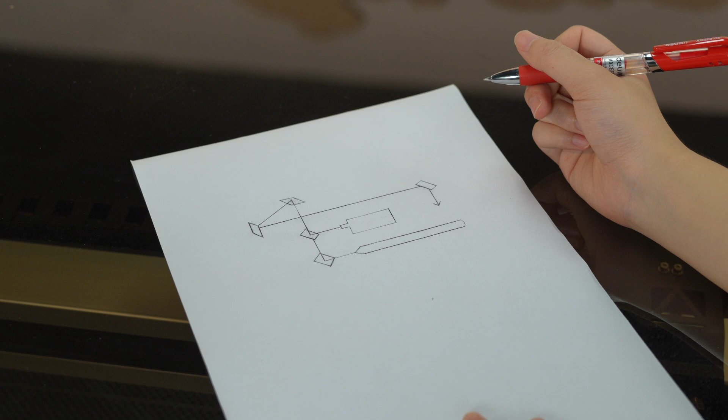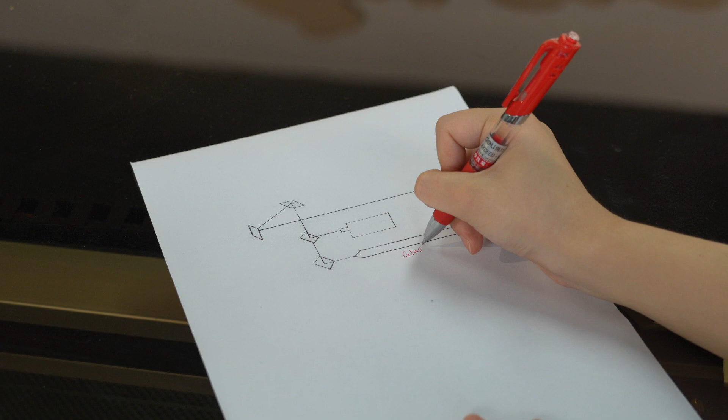Before we get started with alignment, let's go through the process in advance. We set up double tubes for the Nova Super machine: a high power glass tube and an RF metal tube.

So we have two alignment processes to go. Let me first introduce each of the mirrors. This is the glass tube; the mirror facing it I call mirror A1. This is the RF metal tube; the mirror facing it I call mirror B1.

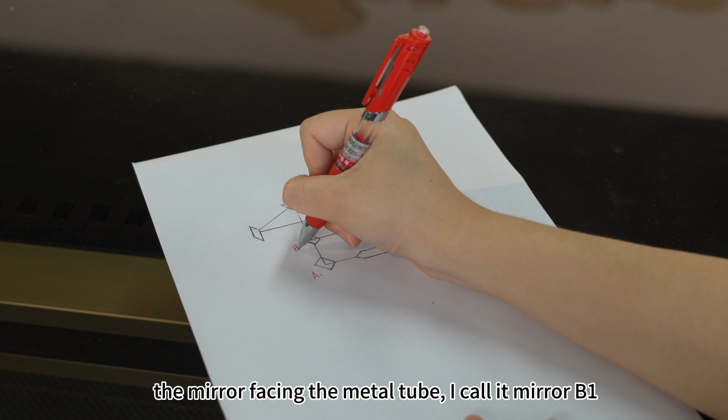These are mirror 2, mirror 3, and mirror 4 on the gantry. Mirror 4 is on top of the laser head.

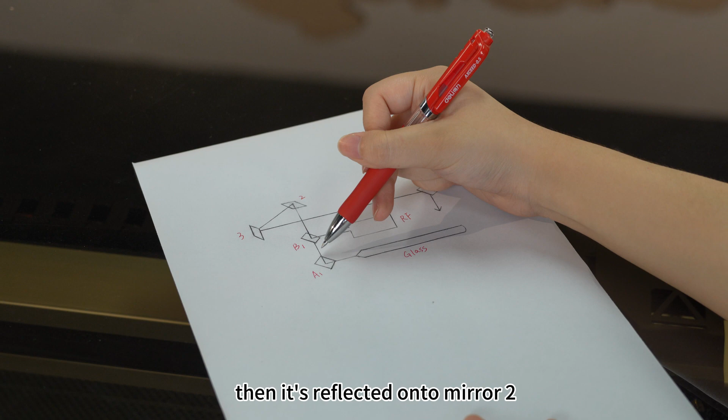The beam from the glass tube first hits mirror A1, then is reflected onto mirror 2, then mirror 3, mirror 4, and finally reflects vertically onto the surface of the material. The beam from the RF metal tube first hits mirror B1, and the following beam path is the same as the glass tube, passing through mirror 2, mirror 3, and 4, finally reflecting on the surface of the material.

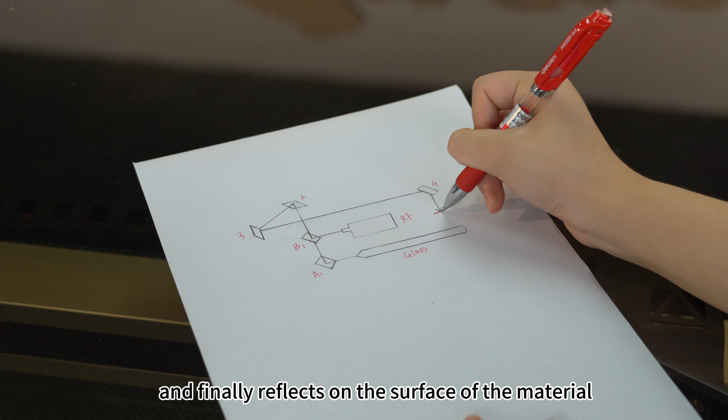Let's do the mirror alignment for the glass tube first. Before we do the operation, let me show you the tools we're going to use this time.

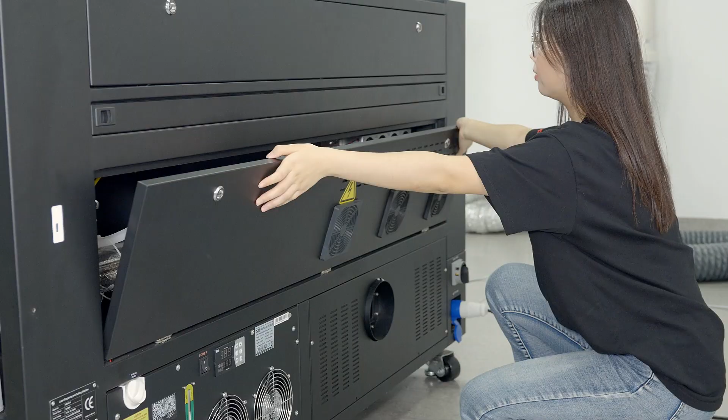To get started, we open up these two side panels of our machine. This one is for the glass tube, and this one is for the RF metal tube.

Now we go for the glass tube. There is a bracket here. You can move the tube forward and backward by adjusting these 4 screws, and unscrew these 4 nuts.

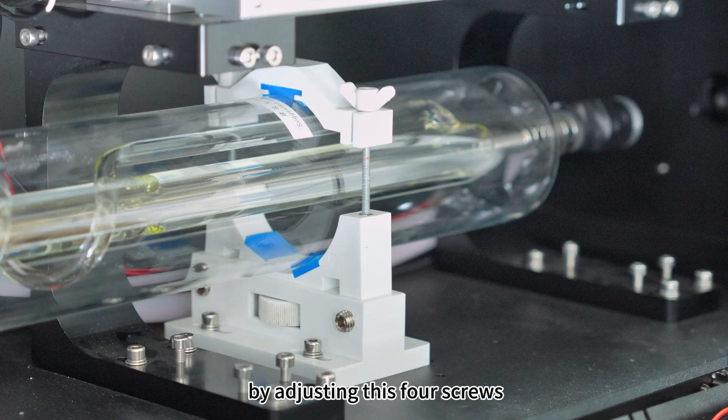You can use this rotary knob to control the height of the tube. Now, what we need to do is adjust the position of the glass tube.

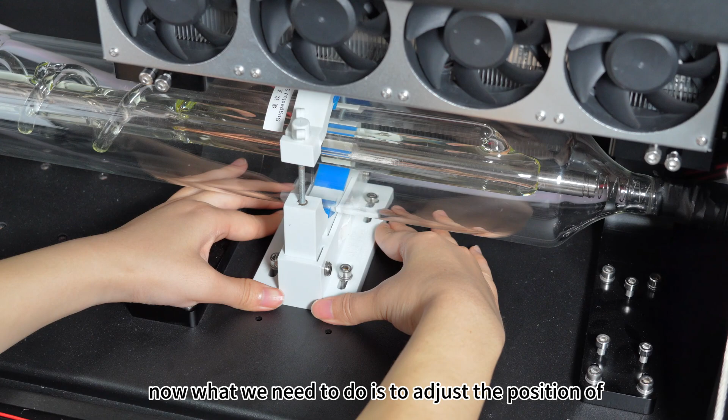Mount an acrylic target on the circular hole directly opposite the glass tube. Take a shot and try to let the beam pass through the exact center of that circular hole.

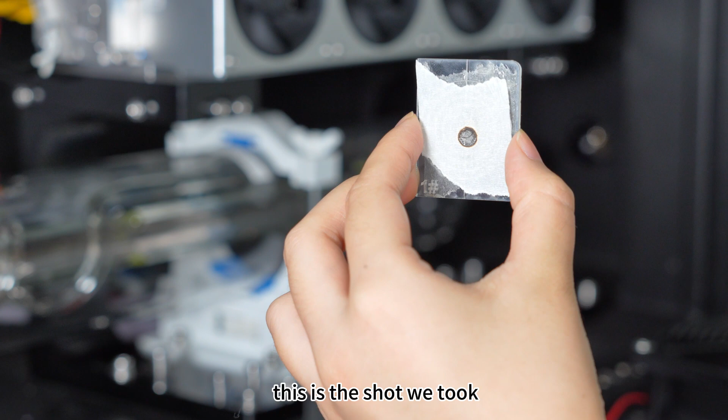This is the shot we took. It's almost in the center, so it's done. After adjustment, lock every screw right here.

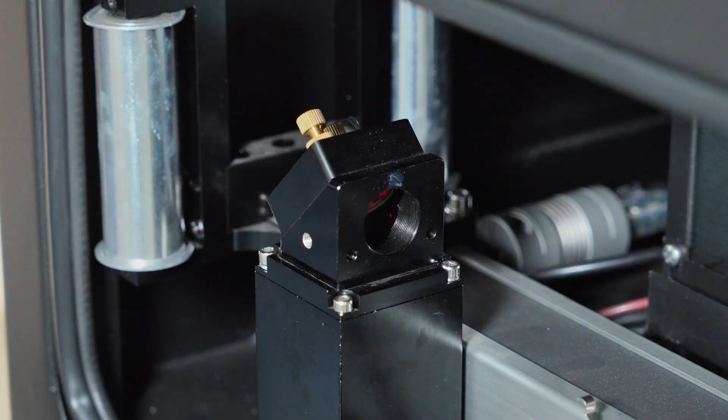Now we come to this side. Unscrew these 4 nuts and remove this whole part with mirror 2. Break the plug here and take off this whole part with mirror 2.

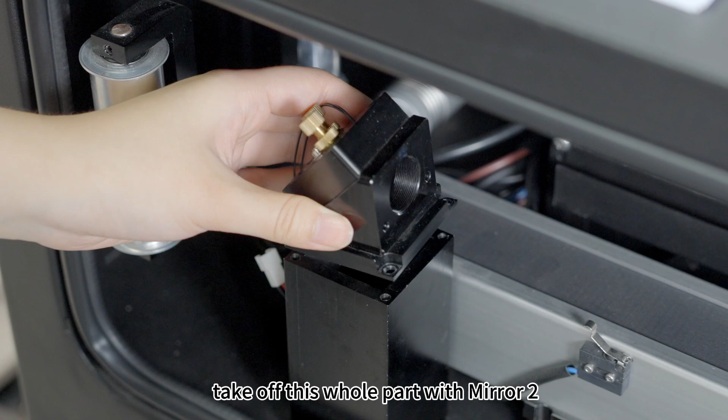Put an acrylic target on the bracket under mirror 2. Make sure you push the target against the bracket and take a shot.

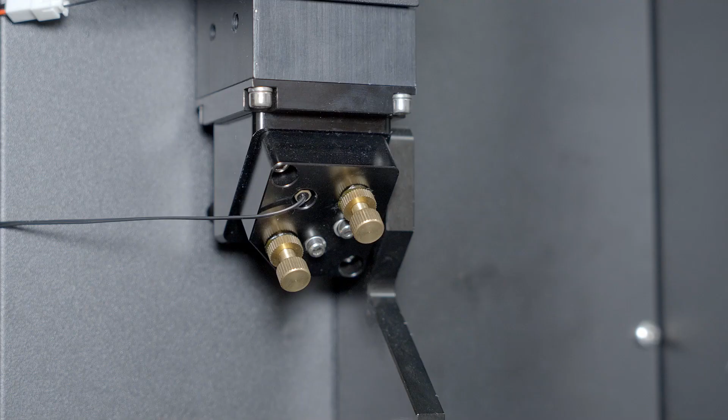If you look at this burn mark, it was over to the left, so we should adjust the knobs to try to get the beam in the center. The way you turn the knobs will control which way the beam turns.

As for the left knob, if you turn it clockwise, the beam will go to the right; counterclockwise, it will go left. As for the right knob, turning it clockwise makes the beam go up; counterclockwise makes it go down.

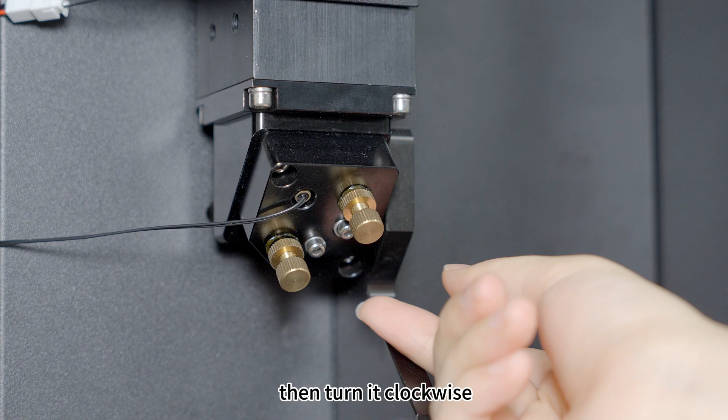So in order to move our beam to the right, I need to turn the left knob clockwise. Before we do that, unlock the nuts behind it. Then turn it clockwise. Let's take another shot to check.

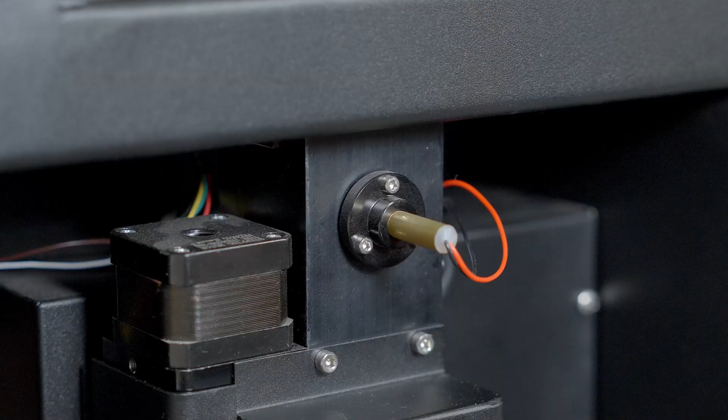This time, the burn mark is in the center. Great! To make it easier to observe the motion trail of the beam later, now project the red light onto the center point here. You can move the red light by adjusting these 3 screws. Let's do it.

Since the whole part with mirror 2 needs to be installed in the following operations, now we align the beam from the RF metal tube to be at its burning point. Let's go to the RF tube operation.

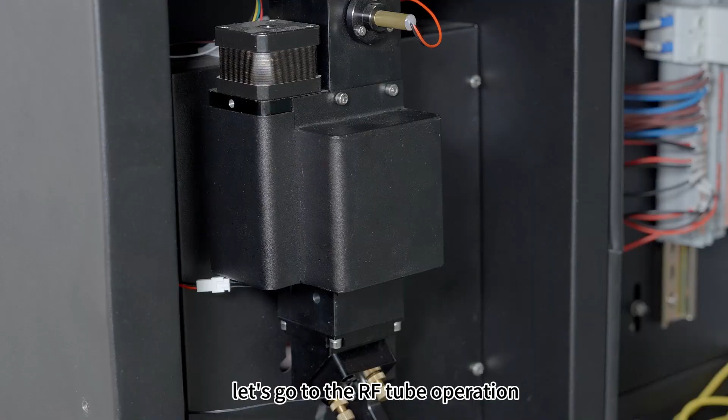Use a screwdriver to take out the screws and remove the big cap.

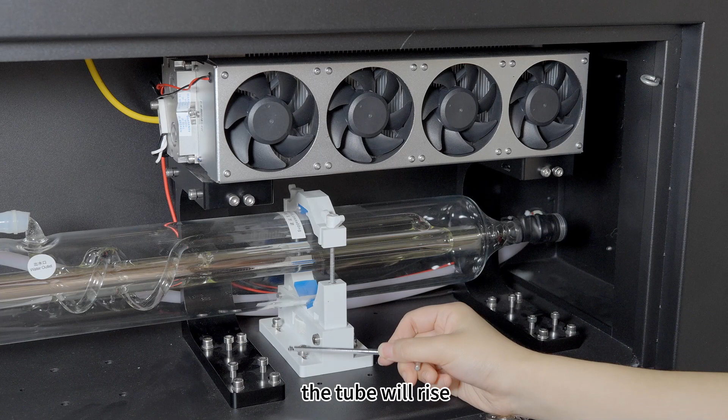First, adjust the position of the RF tube. These 2 brackets here control the height of the RF tube. If you tighten the top screws and loosen the short ones, the tube will rise, and the opposite situation will occur in reverse.

These two brackets here control the horizontal position. If you tighten the top screws and loosen the short ones, the tube will move outward. In reverse, the tube will go inward.

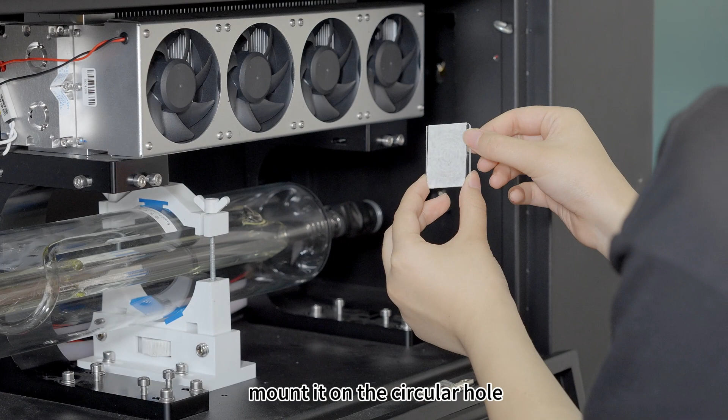Change a piece of tape on acrylic target number 1, mount it on the circular hole directly opposite the RF tube. Switch to RF tube mode and take a shot.

This is the shot we took. It's exactly in the center. Very good. Next, come to this side again.

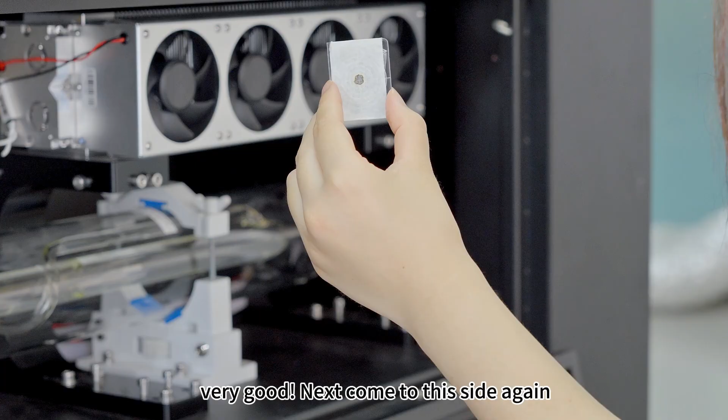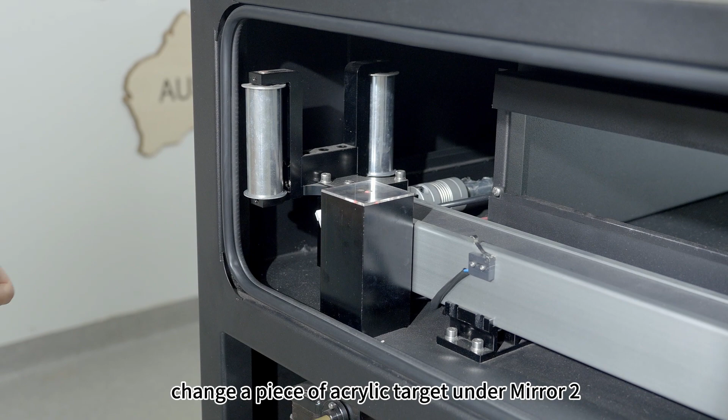You can see we are still in RF tube mode. Now switch to glass tube mode. In order to facilitate observation, change a piece of acrylic target under mirror 2 and take a shot.

Due to the previous adjustment, we got the burn mark in the center. The next thing we have to do is try to get the beam from the RF tube to the same position. Now switch to RF tube mode and take a shot.

This burn mark is a little bit low and over to the left, so we should make adjustments. Let's adjust these two knobs.

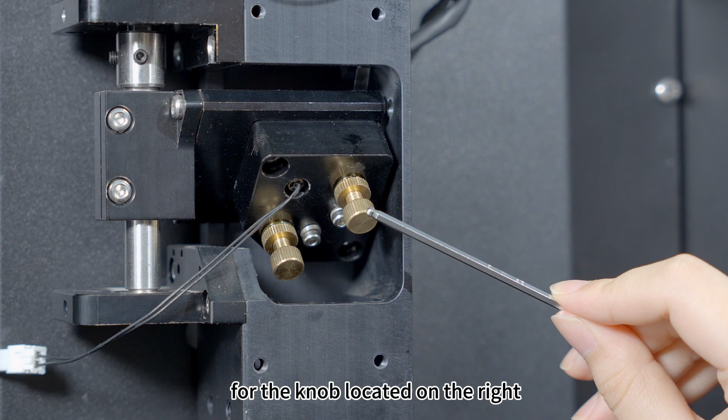For the knob located on the right, turning clockwise will raise the beam up; in reverse will lower it. The second knob, located on the left, turning clockwise will move the beam to the right; in reverse will move it to the left.

So our adjustment should be a clockwise turn of the right knob to move the beam up, and another clockwise turn of the left knob to move the beam to the right.

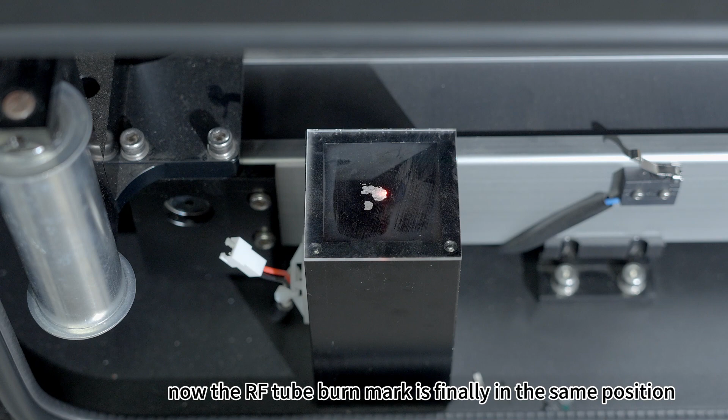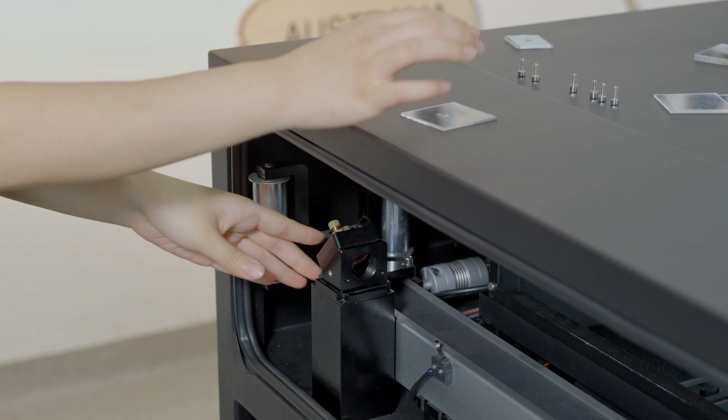Now the RF tube burn mark is finally in the same position as the one from the glass tube. Put this whole thing with the mirror 2 back, and lock all the screws.

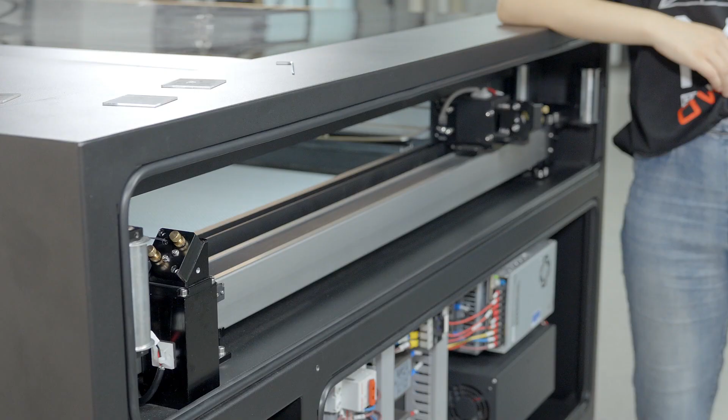Next, take a near and far shot on the y-axis. Try to get the burn marks on the center of the targets and have the two marks overlap. Switch back to glass tube mode, then jog the gantry all the way to the back.

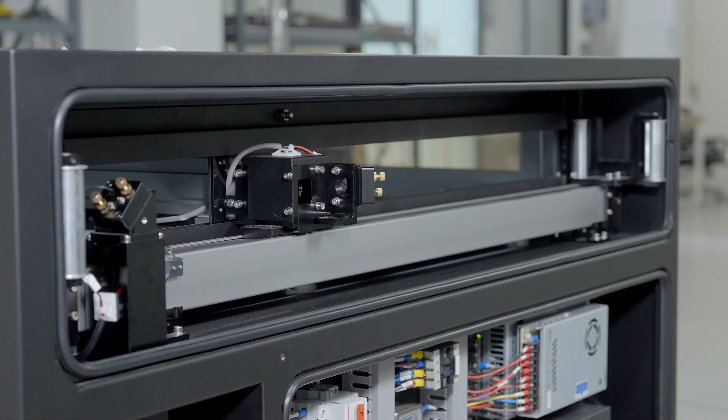Mount acrylic target number 3 on the mirror 3 bracket. Push it against the back wall, make sure each side is nice and flush, and put tape on it.

Take a shot. The burn mark is low and to the right. In order to get the beam as close to the center of the target as possible, we have to raise it up and move it to the left.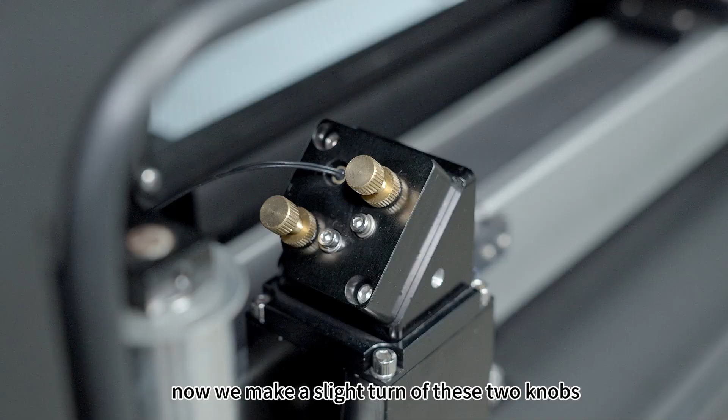Now we make a slight turn of these two knobs. If you remember from the last mirror, the knob on the right adjusts the laser right to left. Turn it clockwise, the beam will go to the right; turn it counterclockwise, the beam will go to the left. The other knob, turned clockwise, will lower the beam; in reverse, it will raise the beam up.

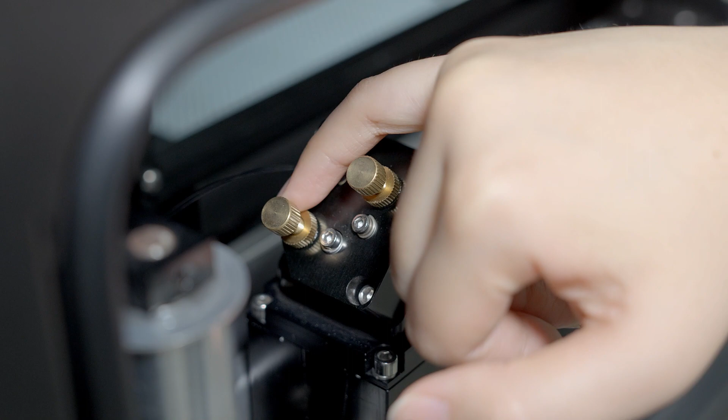Again, we start by unlocking this first, then turn the two knobs counterclockwise.

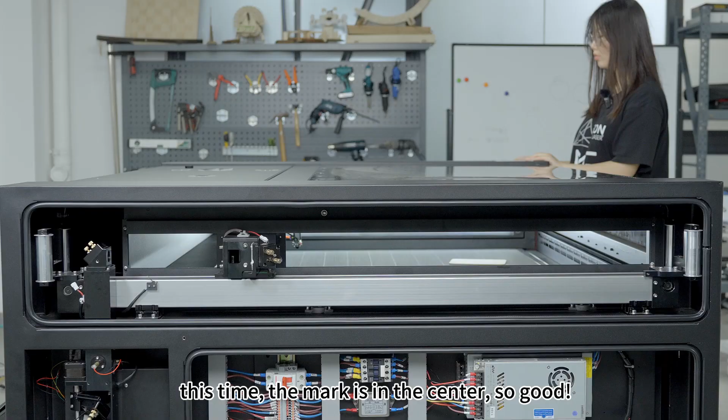Let's check again. This time the mark is in the center, so good. Jog the gantry to the front side to take a far shot.

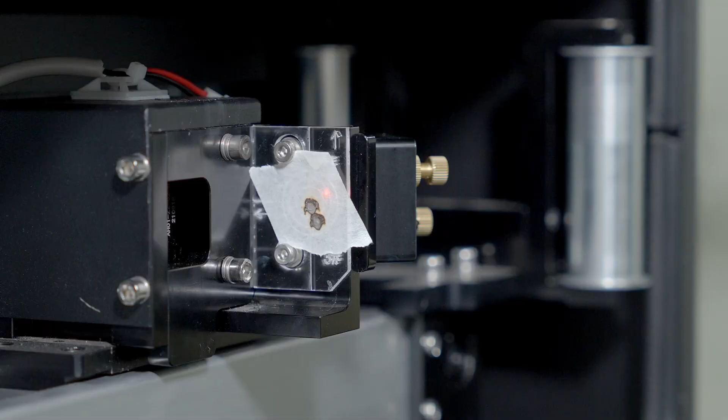This is the center point we got from the near shot. To make sure the beam is shooting parallel right down the baseline, the far shot burn mark needs to be in the same location as this center point. Press the pulse button.

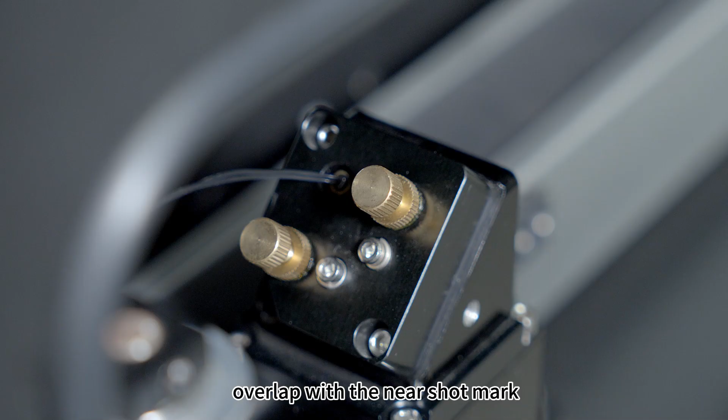You can see the far shot burn mark is still a little bit low and over to the right, so we need to turn the knobs to get it overlapped with the near shot mark. The adjustment this time is the same as the near shot operation - turn the two knobs counterclockwise.

Take another pulse. We got one burn mark in the same spot as that near shot mark. Don't forget to lock the knobs behind. To provide reference for a later operation, now project the red light on the overlapping point.

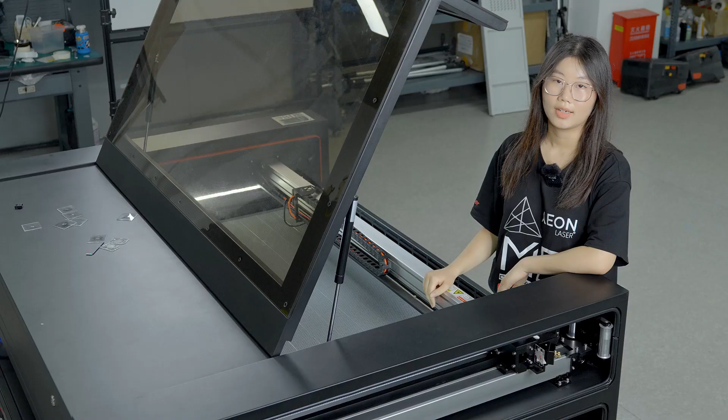Right now, the beam pass test from mirror 2 to mirror 3 is finished. It's a turn for alignment from mirror 3 to mirror 4. It's exactly the same as the last one - it's still necessary that the burn marks of the near and far shot be in the center of the targets as far as possible and overlap.

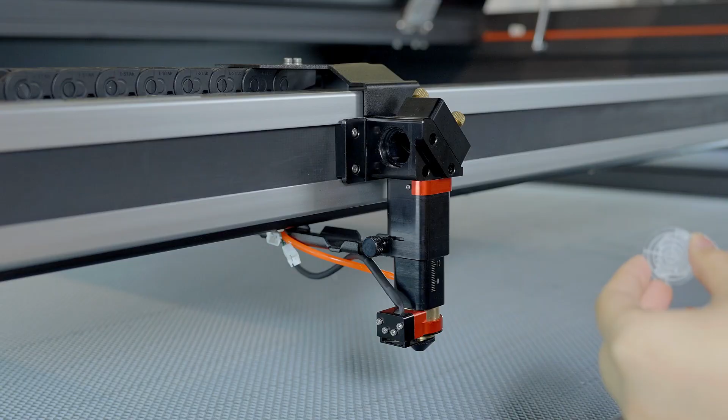Jog the gantry to the left. Install the circular acrylic target right on mirror 4, which is in front of the laser head. Push it against the back, and put tape on it.

Press the pulse button. The burn mark is a little bit to the left, so we should make adjustments with mirror 3 to get it to the right. Let's make adjustments with these two knobs.

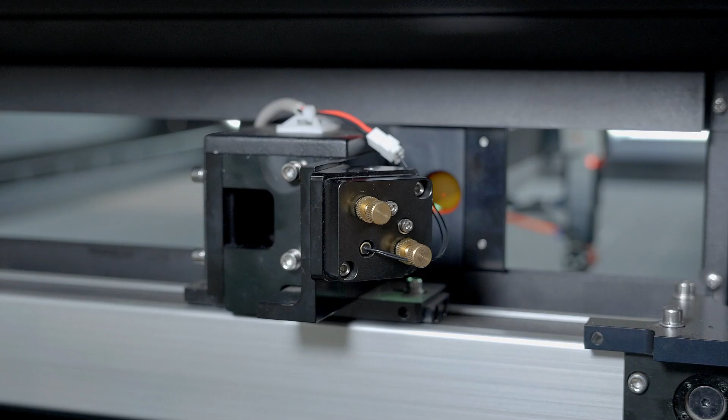The knob on the left adjusts left and right movement of the laser beam. Turn it clockwise, the beam will go to the right; in reverse, the beam will go to the left. The knob on the right adjusts up and down movement of the laser beam. Turn it clockwise will move the beam up; in reverse, it will lower the beam.

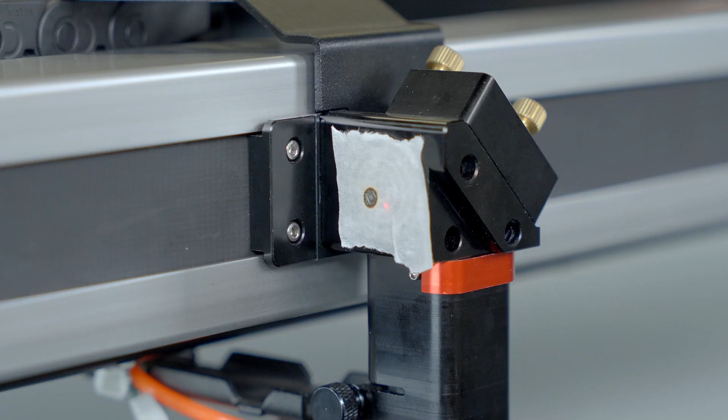Now we should turn the left one clockwise. Then check again. This time the mark is almost in the center.

Very good. Now we should take a far shot and get the far shot burn mark to overlap with this center point. Jog the gantry to the right.

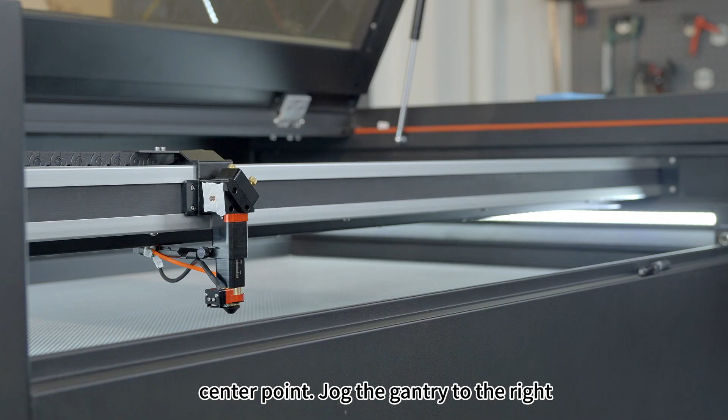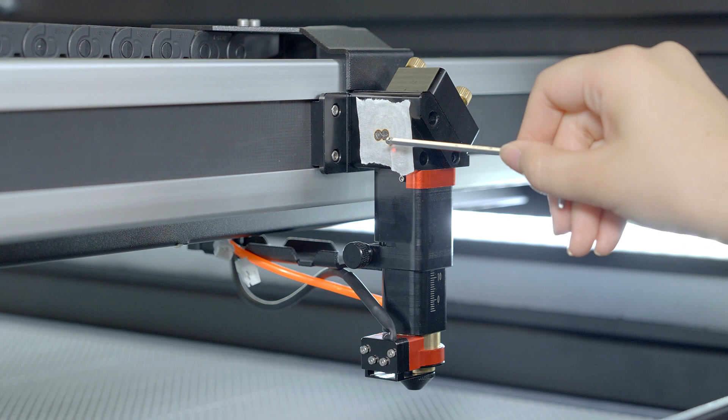Press the pulse button. This is the shot we just took. Obviously, it's low and over to the right. So we still need to make adjustments with the knobs to get it to overlap with the center point.

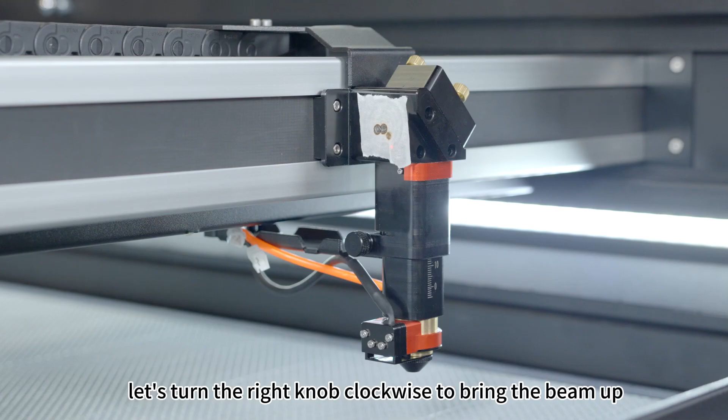Let's turn the right knob clockwise to bring the beam up, and turn the left one counterclockwise to move the beam to the left. Then take another shot. Good, this time they coincide at the center point.

Again, project the red light on the center point. Alright, the red light is now on the center point.

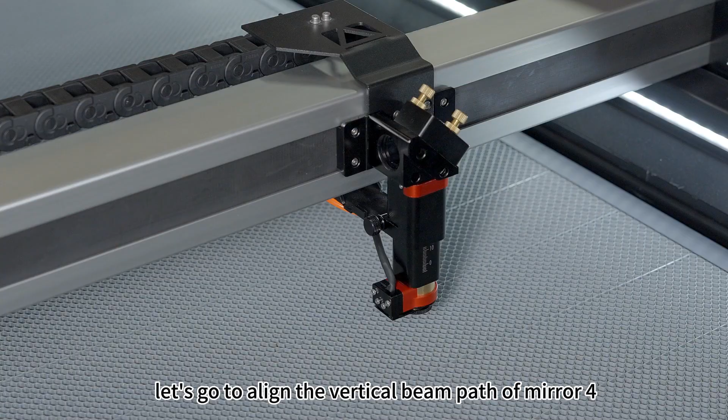Now that all alignment before mirror 4 is finished, let's go to align the vertical beam path of mirror 4. We need to adjust the vertical direction of the beam path so that the beam can pass through the small hole below - this is the small hole - and finally get to the surface of the material. Let's remove the nozzle.

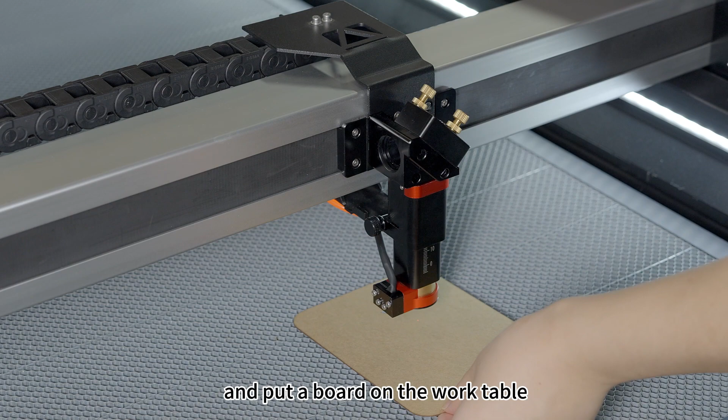Put a board on the work table. Press the pulse button. It can be observed that the beam mark position is too offset, so adjust these two knobs. Try to make the beam mark be positioned vertically below the laser head.

We are going to get the beam down and to the left. For the knob located at the bottom, turning it clockwise will get the beam to the left, and in reverse will get the beam to the right. For the second knob, turning it clockwise will get the beam down, and in reverse will raise the beam up. So our adjustment should be a clockwise turn of the bottom knob and another clockwise turn of the second knob.

Press the pulse button again to check. This time the burn mark is almost in the center. So next we put the nozzle back.

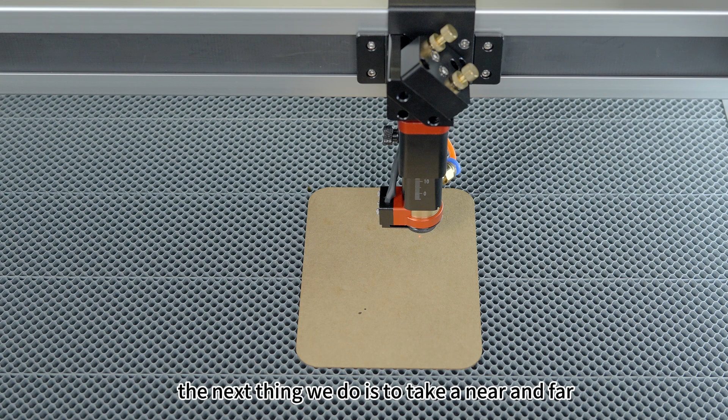As you can see, the red light has already come out of the small hole. The next thing we do is to take a near and far shot on the board. Now press the focus button.

Then take a pulse. This is the near shot we took. Then move the work table down.

Take a pulse again. Obviously, this far shot is shooting perfectly in the same spot as the first near shot. If you find out that the far shot doesn't overlap with the near shot, just adjust these two knobs again.

Next, project the red light on the overlapping point. By now, all the mirror alignments for the glass tube are done. It's time to align mirrors for the RF metal tube.

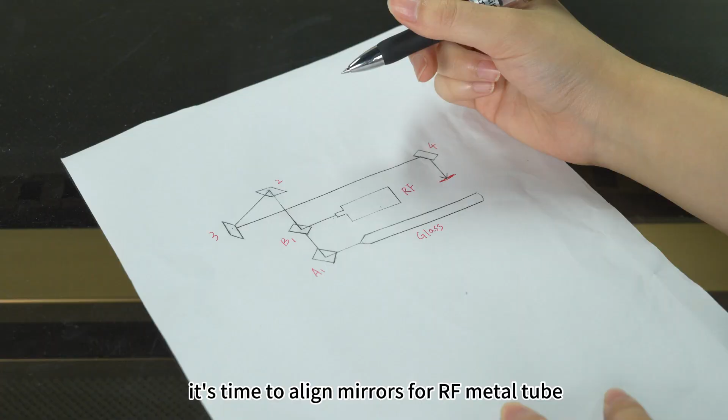Since glass tube and RF tube both need to pass through mirrors 2, 3, and 4, and we have already got an ideal beam path by doing mirror alignments for the glass tube, now we only need to align the beam path of the RF tube with the beam path of the glass tube.

As the near and far burn marks of the glass tube on the y-axis have coincided, now we can choose any point on the y-axis to align the two beam paths. Since we have just done the mirror alignment operation under mirror 2, we will directly choose the middle position of the y-axis here. Now we only need to align the beam path of the RF tube to the beam path of the glass tube at this position. Let's get to it.

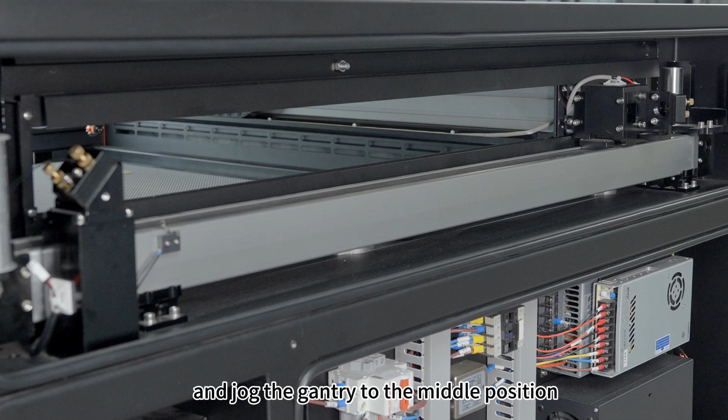Now we are still in glass tube mode, and we jog the gantry to the middle position. Mount acrylic target number 3 on the bracket. Make sure each side is nice and flush.

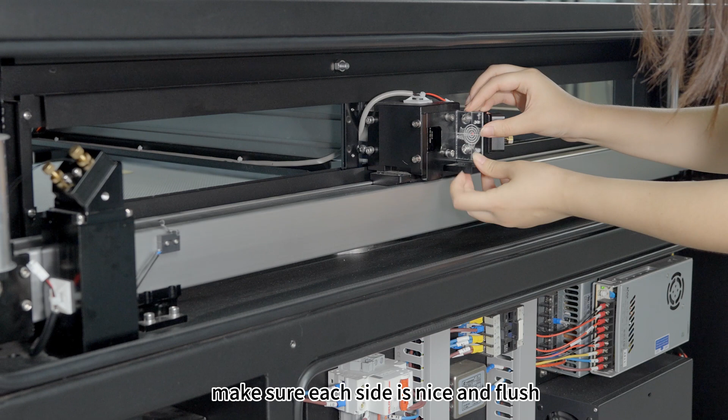Put a tape on it and take a shot. Okay, we got the beam spot from the glass tube on the y-axis. We need to get the beam spot from the RF tube to overlap with this spot.

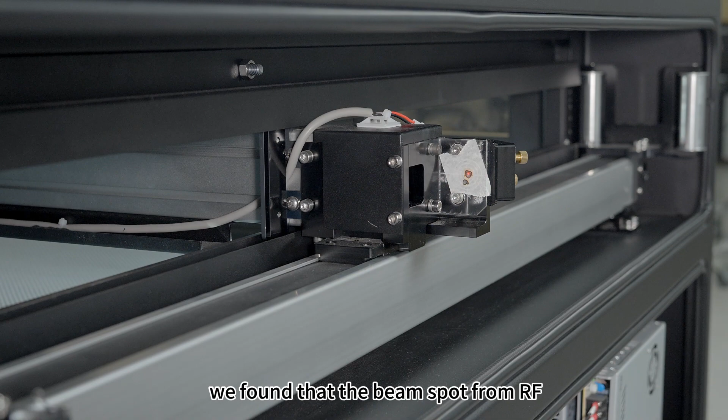Then switch to RF tube mode. Take a pulse again. We found that the beam spot from the RF tube is on the lower left of the glass tube spot.

Now we need to move the beam path of the RF tube up to the right. Let's make adjustments to mirror B1 to move the beam spot of the RF tube onto the spot of the glass tube. Then take a pulse again.

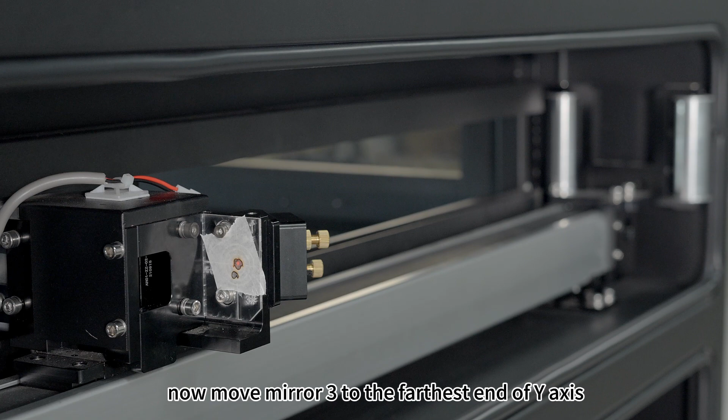Very good, the two beam paths almost overlap on the middle position of the y-axis. Now move mirror 3 to the furthest end of the y-axis. Repeat the previous steps to see if the two beam spots coincide as well.

Good, they overlap. If you find that the beam spots don't overlap, just continue to adjust mirror B1. So far, we have completed the adjustment for the beam path of the RF tube on the y-axis.

Next, we only need to align the beam path of the RF tube with the one of the glass tube on the x-axis. Then all the beam path adjustment work is basically completed.

As the near and far burn marks of the glass tube on the x-axis have also coincided, we can choose any point on the x-axis to align the two beam paths. I recommend you choose a far point. Switch to glass tube mode.

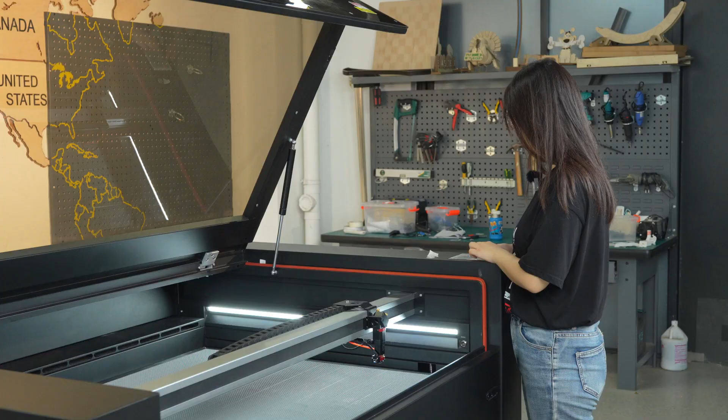Mount the circle acrylic target on the mirror 4 bracket. Push it against the back. Put a tape on it. And take a shot.

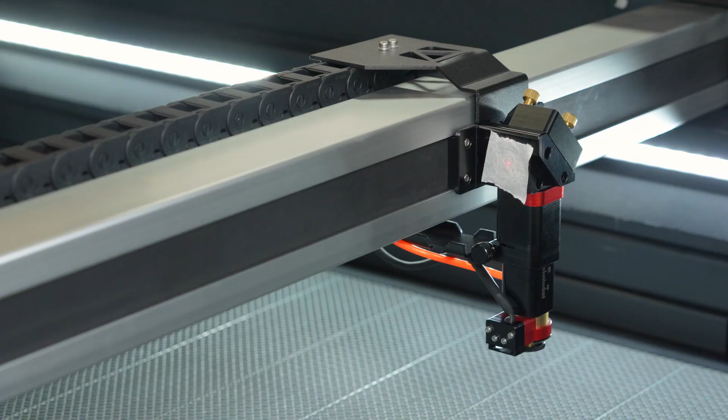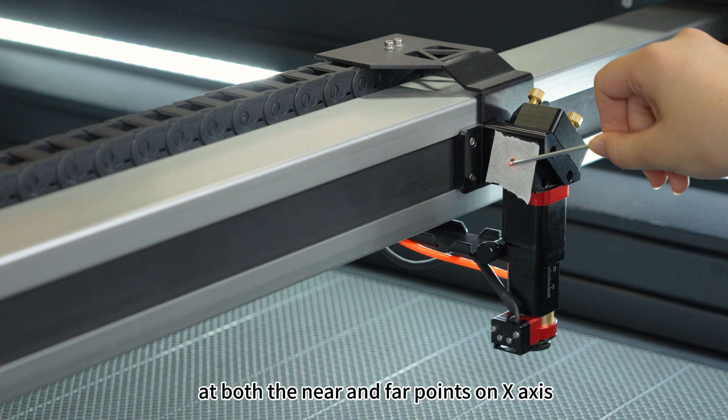We got the beam spot from the glass tube on the x-axis. Next, we align the beam path of the RF tube to this beam spot at both the near and far points on the x-axis. Let's continue to do the work.

Jog the gantry to the left. Switch to RF tube mode. Pulse at the near point. Okay, the two marks overlap.

Let's move mirror 4 to the far point of the x-axis. And pulse again. We find that the RF tube burn mark is over to the right.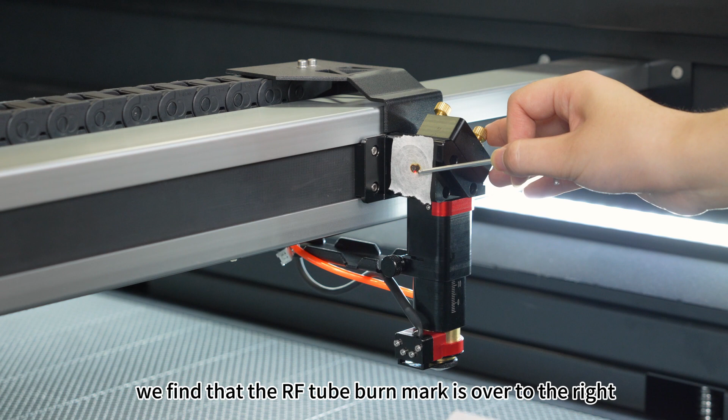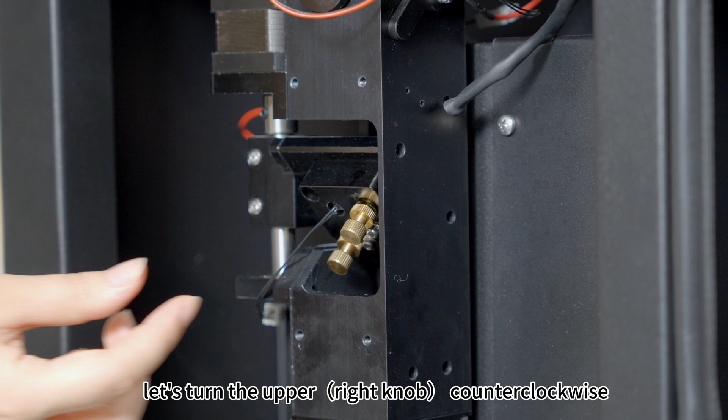So make adjustment to mirror B1 again and move the beam spot of the RF tube onto the spot of the glass tube. To get the beam moving to the left, let's turn the upper knob counterclockwise. Let's take a pulse to check.

Two spots coincide perfectly. That's so good.

The last step, we have to check whether the light can come out of this hole in the mode of the RF tube. Let's put a tape on it to check.

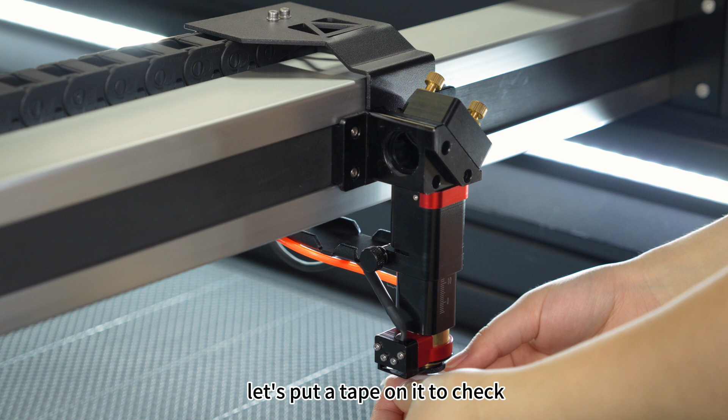And press the pulse button. The light comes out. Now all the beam path adjustment work is finally finished.